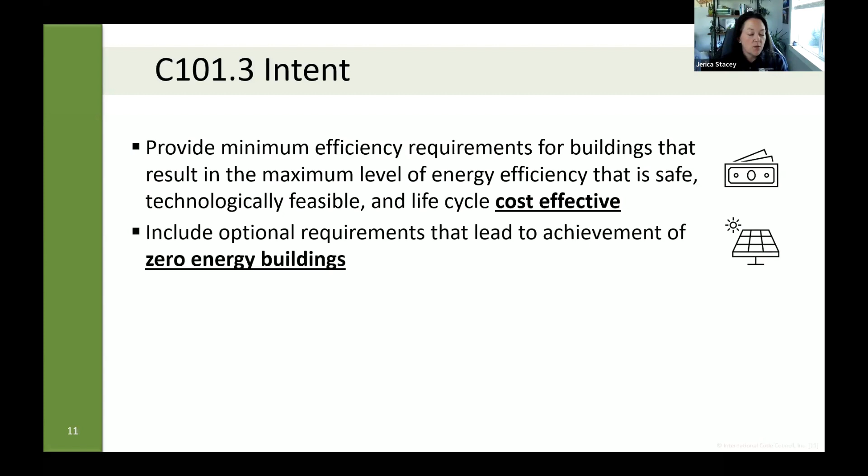We also need to make sure that there's a zero energy building compliance pathway. So for those jurisdictions that want to get to zero energy, we have to include within the energy code an option for them to get there. We do that through the zero energy appendix, and we had that in the 2021 as well. But we codified this language that says, yes, we have to have these options for jurisdictions that want to go above code minimum.

Along that same line, we can also include additional energy efficiency and greenhouse gas reduction resources within the code or within the appendix, depending on how you read the intent section. We wanted to make sure we were assisting jurisdictions in meeting all of their goals. This is the first time we actually see mention of greenhouse gas reduction resources in the energy code at all. We want to make sure those resources are available for jurisdictions.

And then finally, each subsequent edition has to provide increased energy savings over the prior edition. What that really means is that throughout the development process, we're constantly doing analysis. Pacific Northwest National Laboratory does the analysis to make sure that the changes occurring are going to result in an energy code that is more efficient than the previous version. We've actually been doing that with each code edition anyway.

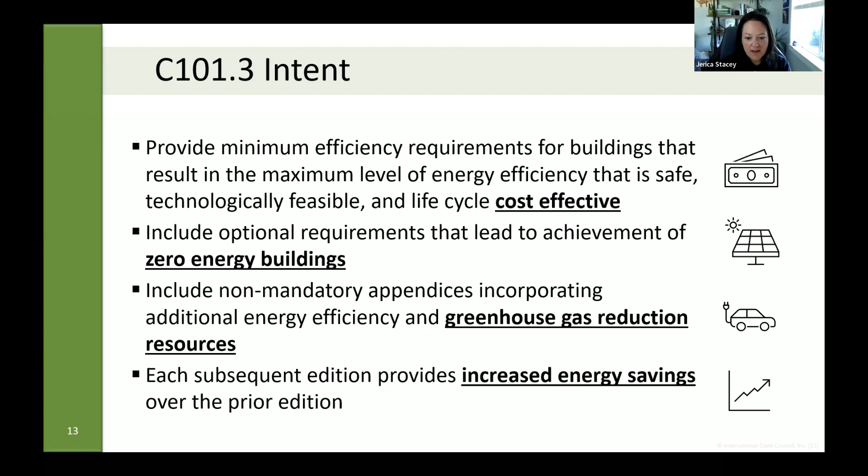I have a little bit of data here for you. Every time we have a new model energy code, the Department of Energy, through Pacific Northwest National Laboratory, issues a determination.

That determination is just whether the current version of the energy code is more efficient than the previous version. When we're talking about residential energy efficiency, DOE looks at the IECC and looks very closely at the residential provisions, comparing that to the previous code. On the commercial side, they typically look at ASHRAE Standard 90.1.

This data is still very important to us that are using the IECC because it is a compliance path, and we typically assume that our compliance paths are going to get you relatively to the same end point as far as energy efficiency goes.

So when DOE looked at ASHRAE Standard 90.1 2022, which is included in the 2024 IECC, they found about a 9 to 10% increase in site energy savings, increase in source energy savings, and then a reduction in carbon emissions by about 9%, and energy cost savings of about 9%, which those energy cost savings are really important to us in just affordability and that sort of thing.

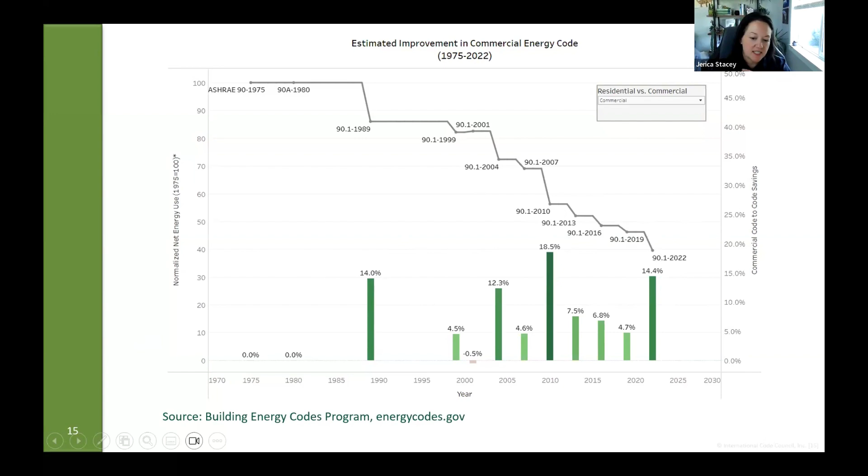We did get analysis on the 2021 IECC, but because that's not what the stretch code is based on, I'm not going to go into details on that. But I mentioned that we need to be doing analysis throughout the development process, so we do have some preliminary analysis on the commercial provisions of the IECC compared to the 2021 IECC. You can see here we're looking at about a 10% increase in savings, much like ASHRAE Standard 90.1, in site energy cost and emissions reductions. So very similar to what we see in 90.1.

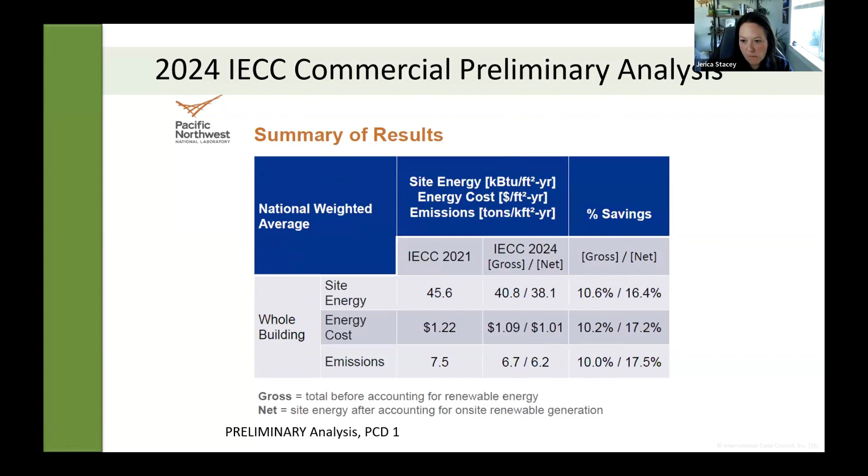A lot of the amendments that we find in the 2024 Illinois Stretch Code are going to support these main goals here. The ultimate goal as it relates to our energy code is to achieve a site energy index of 0.39 compared to the 2006 IECC, or less, by the end of 2031. This initial Illinois Stretch Code is going to help achieve this first goal of a 0.6 site energy index, and then each iteration after this will improve that site energy index to reach that final goal.

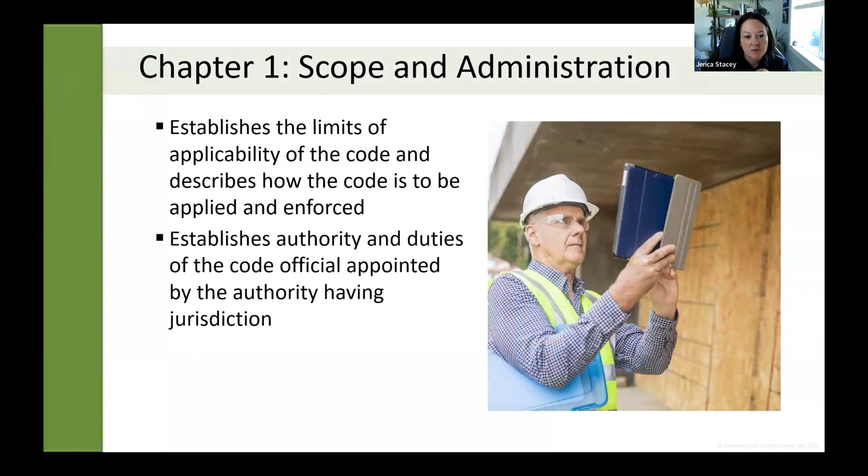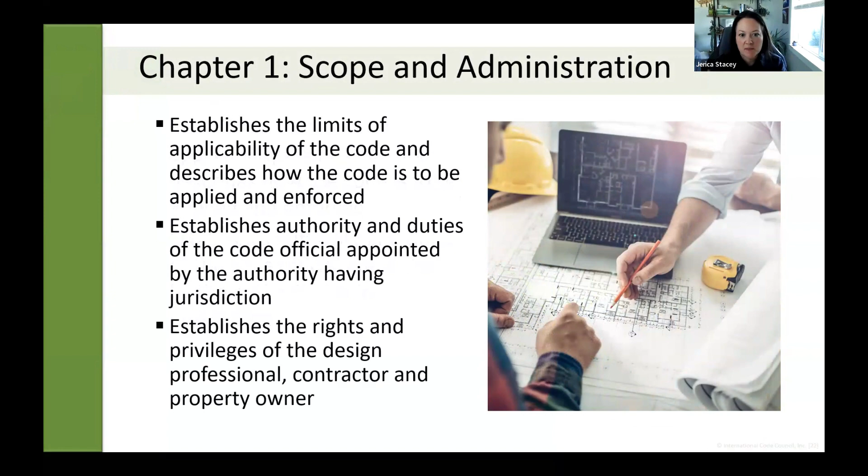We're going to talk first about some of the amendments in chapters 1 through 3, or what we typically call the administration chapters, that comprise the Illinois Stretch Code. These again are amendments to the 2024 IECC. Chapter 1 establishes the limits of applicability of the code and describes how the code is to be applied and enforced. This is the chapter where we find that brand new intent section. It also gives us the responsibilities of the code official and the rights and responsibilities of our design professionals, contractors, and property owners—essentially everybody's roles and responsibilities are outlined in chapter 1. There are a couple of amendments to make note of in the Illinois Stretch Code.

The first is that compliance enforcement procedures are going to be determined by the authority having jurisdiction. So that local jurisdiction is going to have the responsibility of establishing enforcement procedures. And then we also are going to see an expansion of the compliance options.

We can demonstrate compliance through materials like computer software, worksheets, manuals, those kinds of things, or we can have a professional architect or engineer seal on those construction documents, or we can also submit a ComCheck compliance report. So there are three options the code outlines that you can demonstrate compliance with. We would typically see a ComCheck report if you were going to use a component performance approach or total UA, that is within the prescriptive compliance path, for essentially calculating an allowance for your building thermal envelope. But this codifies that we can use ComCheck to demonstrate compliance.

We're also going to get an outline of the appropriate above code programs. We do know that typically in the base energy code, we allow the authority having jurisdiction to deem a program to be an above code program, and it would then comply with the energy code, as long as it also met some additional minimum standards. The Illinois Stretch Code says that for an above code program, we're either going to meet the program requirements of Passive House Institute US, or the requirements within Appendix CC. That is our zero energy commercial building provisions appendix, that is essentially going to have you comply with the 2024 IECC and then use enough on-site or off-site renewable energy to get to zero.

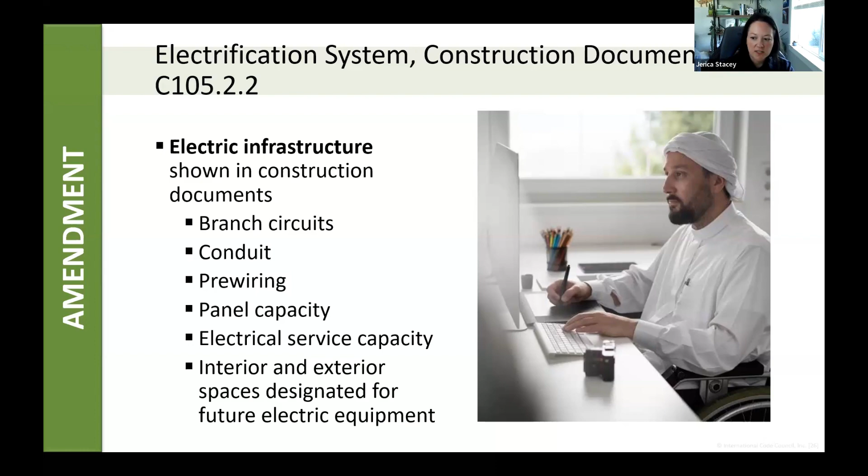We're also going to pick up verification of our electric infrastructure during the electrical system inspection. I didn't make a slide specific for that, but now that we have to show the electric infrastructure on our construction documents, we're also going to have to verify those in the field during that electrical system inspection.

Chapter 2 is our definition chapter. This is going to essentially include all of the specific definitions for the terms throughout the 2024 IECC. Most of our defined terms are going to be italicized, and where a term is not defined, we're going to rely on other I-code definitions. This is really important, especially with building mechanical systems, where we're relying on definitions that are in the International Mechanical Code, or we're going to use common use definitions.

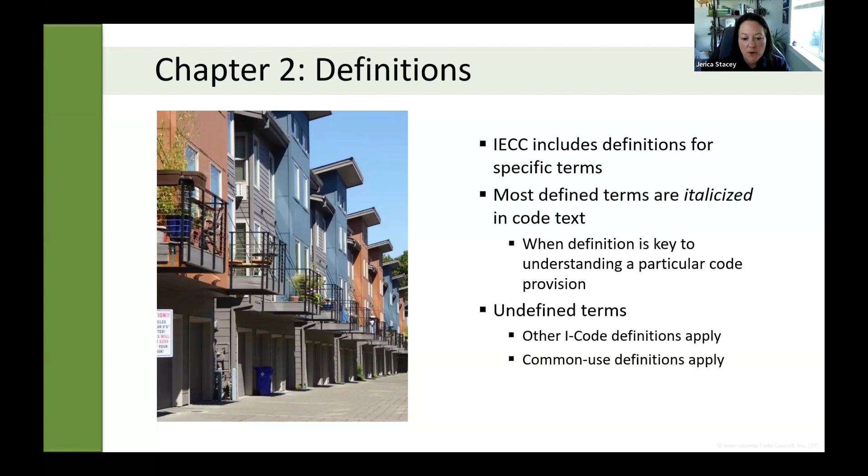I'm not going to go through all of the definitions that have been added to the 2024 or the stretch code, but I've categorized them here for you to be aware of. We're going to see new definitions in the 2024 for renewable energy procurement, thermal bridging, and mechanical equipment definitions.

There's a big effort on both the residential and commercial side to define almost every component of a mechanical system so we can effectively apply the code provisions to them. We'll find total system performance ratio related terms, fan system terms as we continue to look at the fan energy index as our metric for fan systems, and we'll continue to refine those definitions. Control systems for mechanical and lighting components will also get new definitions.

What's new to the stretch code that you won't find in the base energy code are our electric vehicle charging infrastructure terms. We'll talk about requirements for electric vehicle charging and see those terms, but I want to make sure you're aware that there are a lot of new definitions.

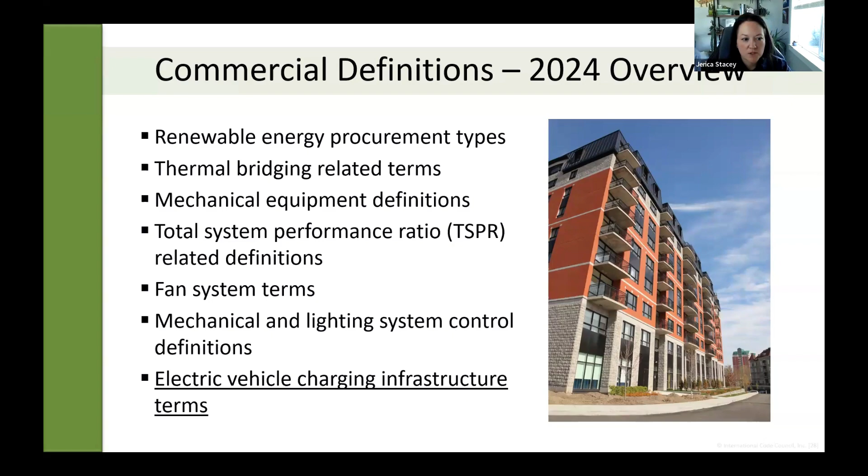When I teach a 2024 significant changes class specifically, I can go through three or four slides of just lists of terms that have changed. I always say, if you're brand new to a code or want to know exactly what's coming down the line, start in the definition section, because you'll pick up all these terms for new concepts. I also like to fine-tune my own knowledge on how the terms are defined. There are no changes to chapter 3.

Chapter 3 is our general requirements section. It's pretty much the catch-all for all of the provisions that don't necessarily fit somewhere else within the code. We did get that update to our climate zones in 2021.

We don't see any changes in 2024 or in the Illinois stretch code to any of those chapter 3 requirements. Our commercial energy efficiency requirements are in chapter 4. It applies to new construction, and wherever on the existing building side you trigger these requirements, it's going to send you back to chapter 4.

This is also where we find additional energy efficiency requirements, which have really been expanded in 2024. There are some changes or amendments that Illinois made to that section. I'm going to back up and talk about that section a bit more holistically, just to make sure we understand the concept behind it.

First, I'll let you know we do have our typical compliance options. These are really well defined in the 2021, and that carries over. But I love the usability of now saying you have two options for compliance with the commercial provisions: you can either use the IECC or ASHRAE Standard 90.1. If you use the IECC, you can choose between prescriptive compliance or simulated building performance compliance.

And if you use ASHRAE Standard 90.1, the stretch code includes some amendments to 90.1 as well, which isn't something we always see when states amend their energy code. So it's really cool that it's included in the base document. We'll start by talking about the changes that occur within the prescriptive compliance path, and then how those impact what we see in the other compliance paths as well.

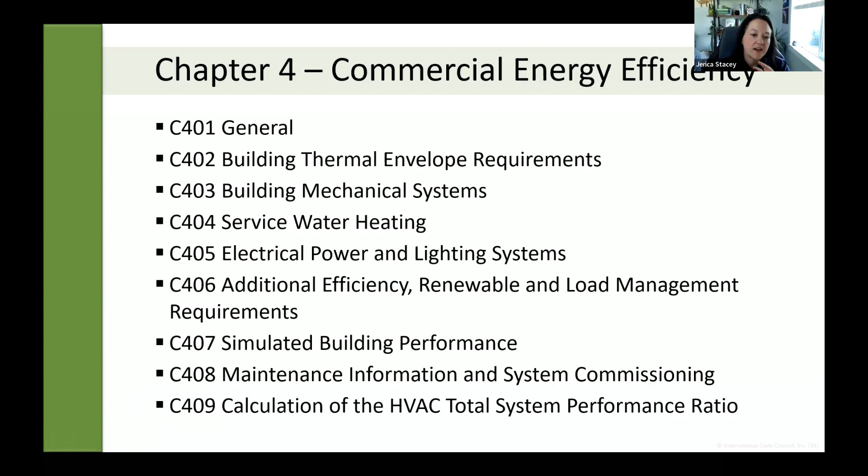It is a compliance option for prescriptive compliance for our building mechanical systems. So that's all I'll say on that, but just making sure that you folks are aware that this is a new requirement in 2024.

So thinking specifically about our Illinois amendments, the first we're going to find is our fenestration orientation section. Maybe not all of the items that we're talking about are amendments to the code. A lot of them are just new sections to the code, which again is Illinois amending the 2024, but not necessarily because there was already a section within the 2024 that we've just tweaked a little. This is new to the 2024 for Illinois as the stretch code.

So essentially, this section is going to limit our east and west facing fenestration. We know that east and west facing windows can contribute to significant heat gains, and most of the time that's going to increase our cooling costs as well. So this section is intended to put a limit on the area for our west oriented and east oriented fenestration. The code gives us 2 options.

The first option is looking at area only, and it limits both the west and east facing fenestration to 25% of the total area. So 25% for west oriented and 25% for east oriented. We've got that limit of about a quarter of our total fenestration area. The second option, it's also looking at area, but it brings in the solar heat gain coefficients as well as another element to figuring out your allowance for east and west facing fenestration.

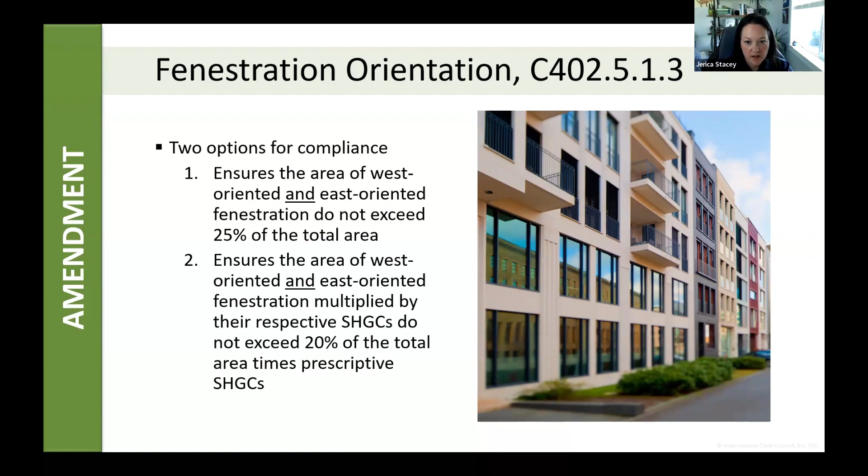We're also going to see a whole slew of requirements related to demand response. Demand response is a concept. I like this little image here. It's kind of geared towards homeowners, but we're going to use our imagination and expand that to our commercial buildings as well. But the main concept is that a building owner or a homeowner, or perhaps it's a tenant in one of our multifamily buildings, they're going to participate in a demand response program.

The utility company or whoever might be issuing a demand response signal is going to send out a signal when we actually need to decrease the energy use. And we're going to require for different building systems for our energy use to be decreased, either by lowering our set points or reducing our output, that sort of thing, for a period of time. Once that signal is ended, then we go back to our normal energy use.

So we see this in our building mechanical sections, where we essentially are going to require that all electric heating and cooling systems have a control that allows for you to participate in the demand response program. There's no requirement to actually participate. This is just allowing you to if you choose to. And typically, you're going to be financially awarded if you do so.

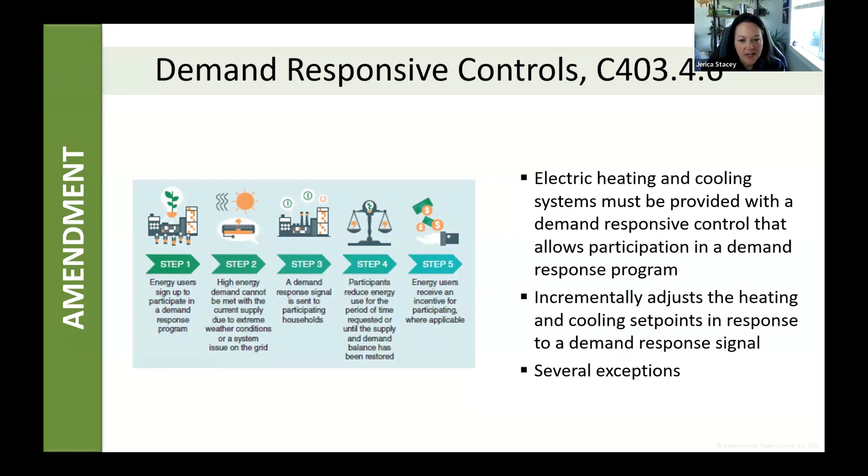On the mechanical side, we're going to adjust the heating and cooling set points by 1 degree, 2 degrees, 3 degrees, 4 degrees over the period of that demand response signal. And again, once it ends, we go back to our normal use. There are some exceptions. Those are going to include things like group H and I occupancies, but throughout this webinar, we're not going to discuss all of the very specific exceptions. So if you're thinking, I don't work on projects that this seems like it would apply to, make sure you check out those exceptions. And that goes for all of our provisions.

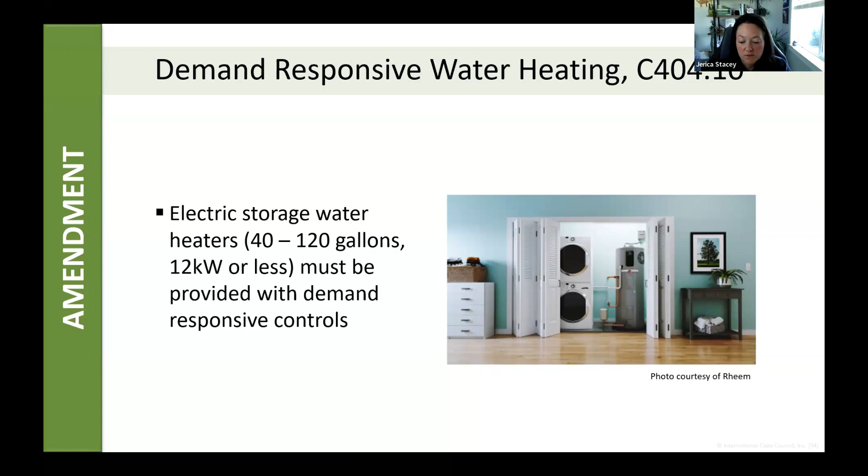Now, water heaters are going to play an important role in demand flexibility because they inherently provide thermal storage. So if we can shift that energy use over a period of time, we're going to be able to meet those goals of our demand signal, and typically with no impact to the user either.

But we also see our demand responsive lighting controls. So this is going to apply to group B, E, M, and S occupancies. And the requirement is that the interior general lighting in at least 75% of the interior floor area has demand response controls. This is another little graphic that kind of looks specifically at how we want the lighting to react when it receives this demand responsive control.

Essentially, what we want to have happen is that we're going to control the output of that lighting to 80% over the period of that demand response signal, but no more than 15 minutes. And we're doing that through continuous dimming. So as soon as we receive that signal, we're continuously dimming for no more than 15 minutes until we get to 80% of the output. And then we can just kind of hold it there. Once that demand response signal is lifted, we're going to go back to our normal lighting settings.

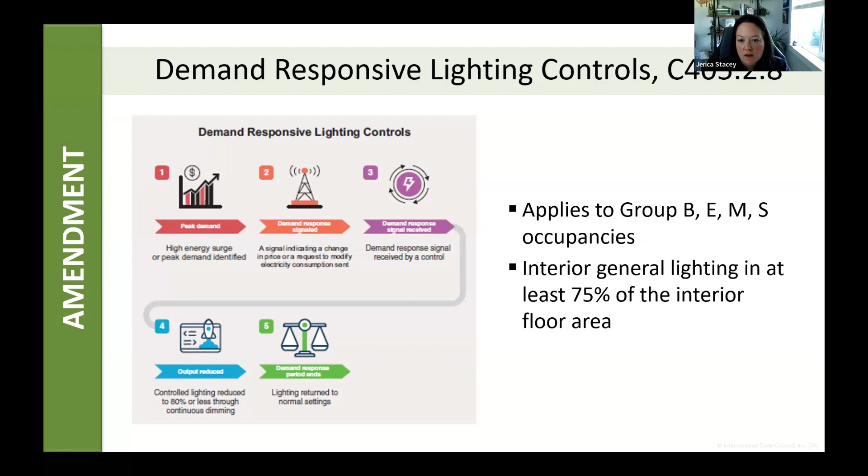We also are going to see some amendments to our horticultural lighting section. So this is a section that is in the 2024 IECC, whereas most of the previous ones are not in the 2024 IECC. They're available as appendices. But this requirement is actually in the 2024 IECC. It's an improvement to the requirement in the 2021, which is where we first saw our plant growth lighting requirements come into play in the model energy codes.

So in grow lighting, we're looking at micromoles per joule, which is this kind of funky looking metric here. That's a measurement of lighting efficiency. It effectively shows us how effectively a grow light converts electrical energy into usable light for our plants. The 2024 is going to give us two different thresholds depending on what our growth facility looks like. If it's a greenhouse, and these have to be permanent greenhouses, so those that are constructed for more than 180 days, our threshold is going to be 1.7 micromoles per joule or better.

For all other horticultural lighting, so this is going to be like our vertical farms and that sort of thing, we are going to have a threshold of 2.2 micromoles per joule. The higher micromole per joule indicates a more efficient light source. So we do have this amendment in the Illinois stretch code that improves the 2024 requirement of 1.9 to 2.2. So we are requiring some more efficient lighting in the 2024. The other amendment that we see in the Illinois stretch code is the exception for cannabis facilities that are subject to the Cannabis Regulation and Tax Act.

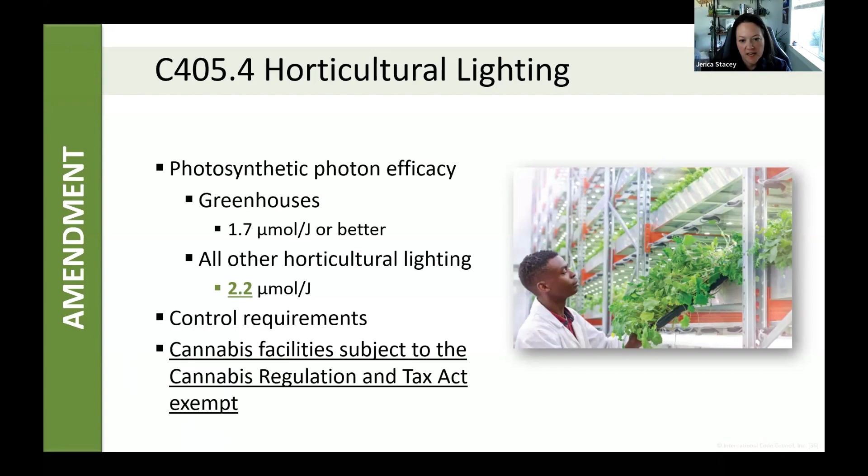We're also going to get requirements for EV infrastructure. So the Illinois stretch code is going to require that our parking facilities have some amount of electric vehicle power infrastructure. And that's going to be determined by table C405-14-1, which I'll show you in a couple slides here. That's going to detail our space types, so whether that's EV capable, EV ready, or EV installed based on our occupancy type. It's also going to be based on the number of automobile parking spaces for that building. And specifically, when we're talking about group R2 buildings, that's going to be based on the number of dwelling units or parking spaces, whichever is less.

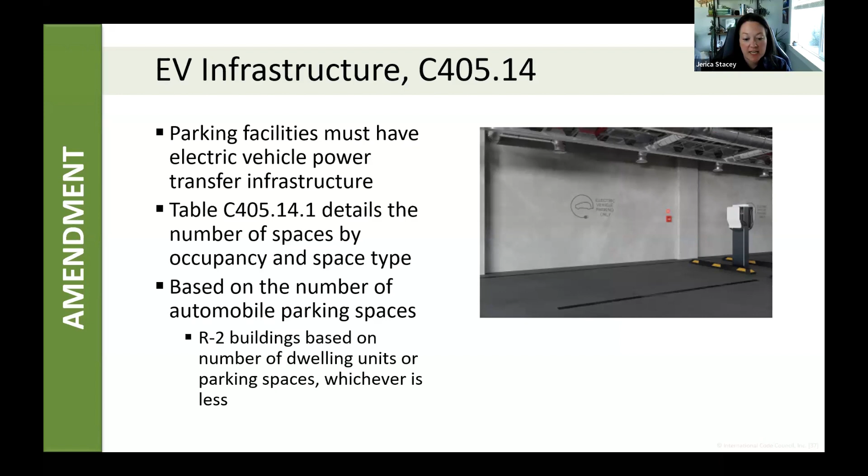So this is one of those provisions that really supports some of CEJA's goals, specifically that goal that is to accelerate electric vehicle adoption and expand the charging station infrastructure. So this code provision is where we're going to pick up those new definitions that are related to electric vehicles, and these also are going to support those requirements for the different space types. It's going to be dependent on what our occupancy type is, but there are different space types.

EV capable, which is a parking spot that has the electrical infrastructure installed. EV ready, which is basically an add-on to that capable. It's got all the electrical infrastructure and it has an outlet or enclosure to connect to that electric vehicle supply equipment. And then an EVSE space is going to be everything fully installed there, ready to plug into your electric vehicle.

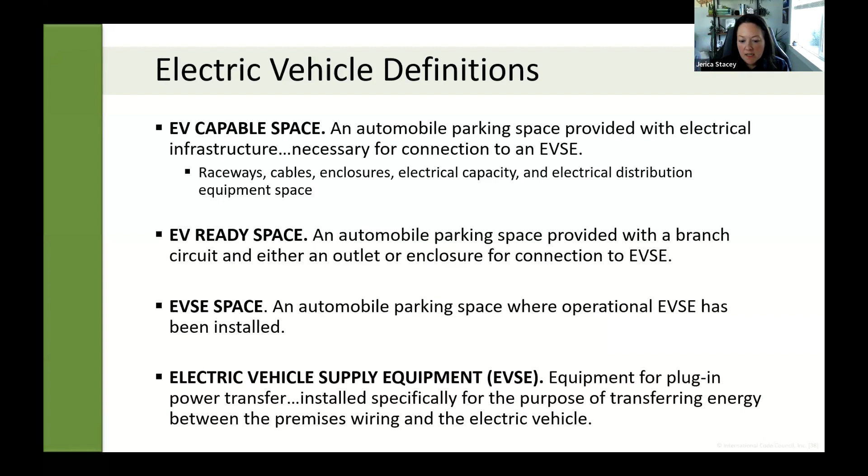So table C405.14.1 is going to tell us how many of these space types, whether that's EV installed, EV ready, or EV capable, are required based on our occupancy type. The code is also going to allow us, if we install more EVSE spaces than is required, to count those towards those ready and capable spaces. And if we install more EV ready spaces, we can count that towards our percentage of EV capable spaces. So essentially, this gives us a tiered approach to our electric vehicle charging infrastructure.

Now, you will notice that for some of these occupancy types, 100% of their parking spaces are going to have to be one of these three. Group R-2 is what I'm thinking of specifically, where 75% are capable, so they have the electric infrastructure, 5% are ready, and then 20% are going to be fully installed.

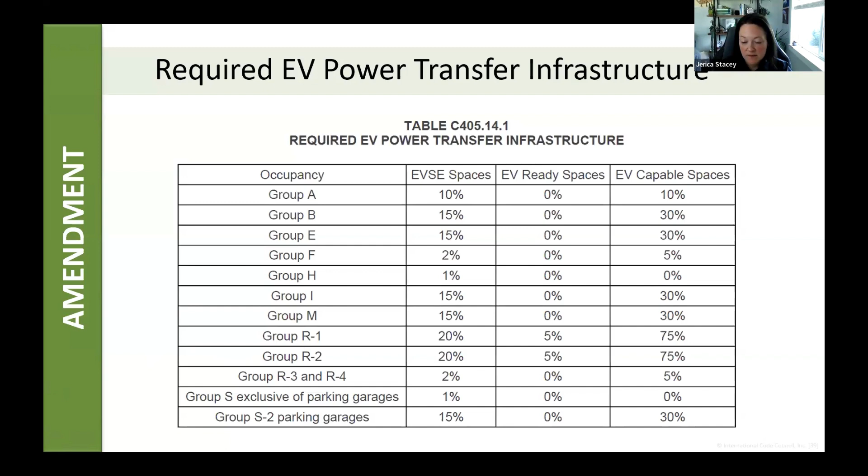We also have a requirement for electrical energy storage systems. This is one of the requirements that really allows the designer and the building owner to decide how to best meet this requirement by giving us two options. The ultimate goal is that all of our commercial projects will have electric energy storage systems in the future. However, this requirement allows us to either be ESS ready, which means that we have an area that's reserved for energy storage systems, essentially ready to install ESS somewhere down the line, or we can just go ahead and meet the requirement by having an installed energy storage system.

The code is going to outline what that actually looks like, but this is one of those requirements that's also going to support the CEJA goals of that energy transition for our communities. This is going to help us, especially as in the 2024, we are going to require some amount of renewable energy for all buildings in climate zones 0 through 7. So this is in support of that same concept.

The other part of this requirement is really going to point us to the International Fire Code and NFPA 855 for those very specific location and minimum area requirements. So you'll want to pay very close attention to those referenced codes and standards as well.

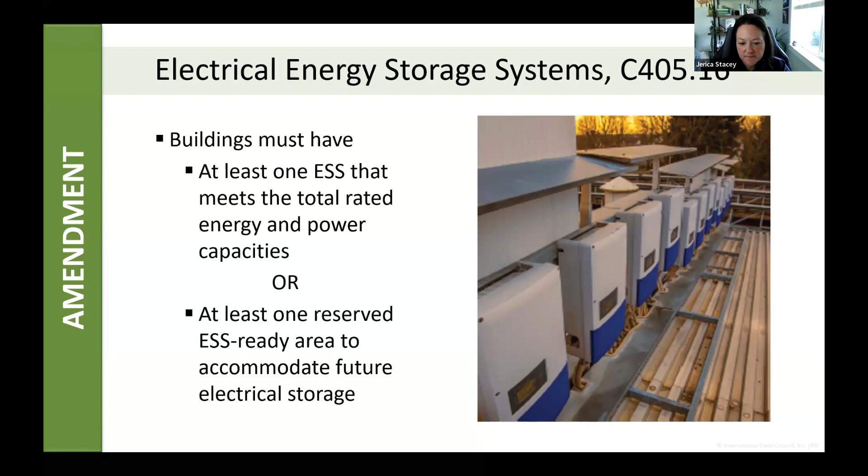And the final one before we talk about additional energy efficiency credits is electric infrastructure. This requirement is going to apply to our Group R-2 occupancies, so those occupancies that have dwelling units, and it's going to require electric infrastructure anywhere that you have fossil fuel equipment installed. So this is going to apply to our space heating equipment, service water heating equipment, our cooking equipment, so ranges and ovens, and then our clothes drying equipment as well.

Anytime we have combustion equipment for one of these 4 equipment types, we also have to have enough corresponding electric infrastructure so that these equipment types can be swapped out for electric in the future without the cost of retrofit. So that's really the important concept behind this, that the next building owner, or, because we're talking about Group R-2 occupancies, the next occupants of that dwelling unit are able to swap out their equipment without the cost of retrofits. And this is also going to support CEJA's goal of supporting communities that are facing that energy transition.

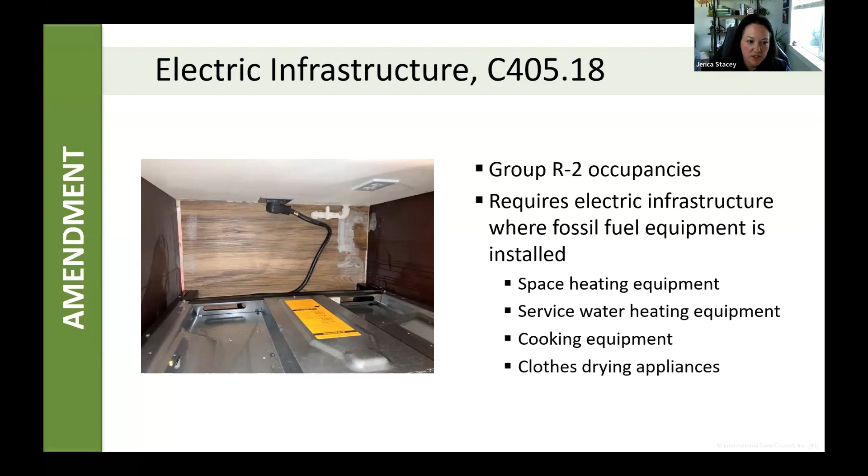All right. We're going to talk now about additional energy efficiency credits. It's not minor, but there's really only one amendment within this section, but I want to talk through the section so that we can see how that amendment actually impacts us. This is a requirement for projects that are complying prescriptively with the code. This section has a complete overhaul compared to 2021. If you're used to the 18 code, the 21 is going to look different, and this is going to look very different. So in 21, we moved towards this credit-based system where we have to earn a certain number of credits based on our occupancy type.

And that same concept applies in 2024, but we really have expanded the number of credits that you have to achieve, as well as requiring renewable and load management credits. The stretch code amendment is going to be an adjustment factor for buildings without heat pumps. So that's the real difference between the 2024 and the Illinois stretch code: this multiplier of the number of credits we have to achieve for buildings that do not have heat pumps.

A reminder that our energy credits have to be over and above what you are already doing in your project to comply with the base requirements of the 2024 IECC, or what the Illinois Stretch Code requires here. There is no double dipping. So if you've already improved your fenestration using some kind of total UA trade-off, you can't then get more credit for that improved fenestration, for example.

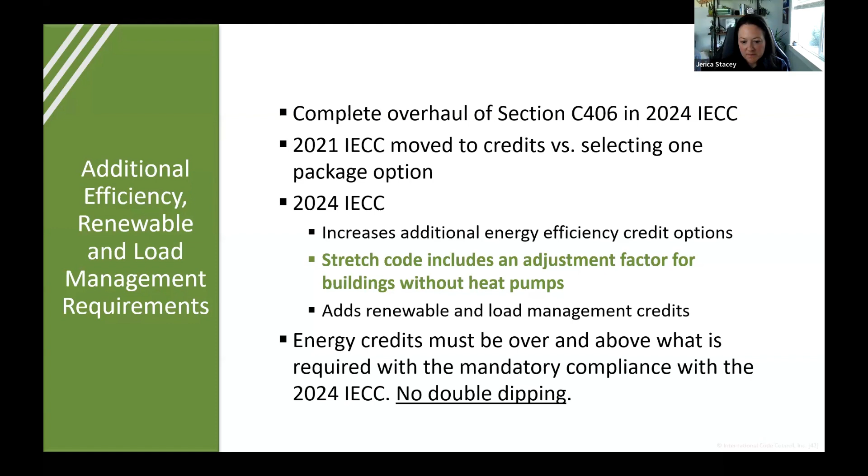The 2024 Illinois Stretch Code includes 32 energy credit measures that we can choose from to achieve those additional efficiency requirements for our building.

The number of credits you need is based on your occupancy type and climate zone, and every measure is worth a different amount of credits depending on those factors. Each credit represents 0.1% of whole building site energy, and the goal is that each project improves their energy cost savings by about 7%. That's why we see differences in the number of credits required, because we're ultimately trying to hit that 7% goal.

In 2024, we also have load management and renewable energy credits introduced. There is some carryover allowed between energy efficiency or base energy credits and those renewable and load management credits. It can be a complicated concept we won't cover today, but just know that if you exceed your credits, you can use them to help reduce the number of credits you might need elsewhere.

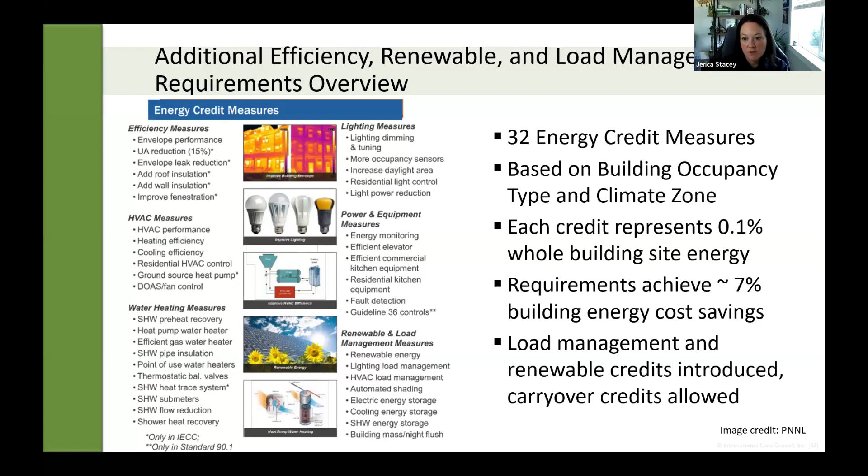So what does this really look like? If we have a building over 2,000 square feet, our additional energy efficiency credits apply. We have two different sets of credits now: additional energy efficiency credits, which I basically just call base energy credits, and these impact the building system—improving the building thermal envelope or the efficiency of our mechanical system. These are elements within the building that are more permanent in nature.

Then for projects over 5,000 square feet, we're going to have a certain amount of additional energy efficiency credits and renewable and load management credits. This is a new set of credits we have to achieve, and those are going to be less permanent in nature—more like adding additional renewable energy or managing loads and that sort of thing.

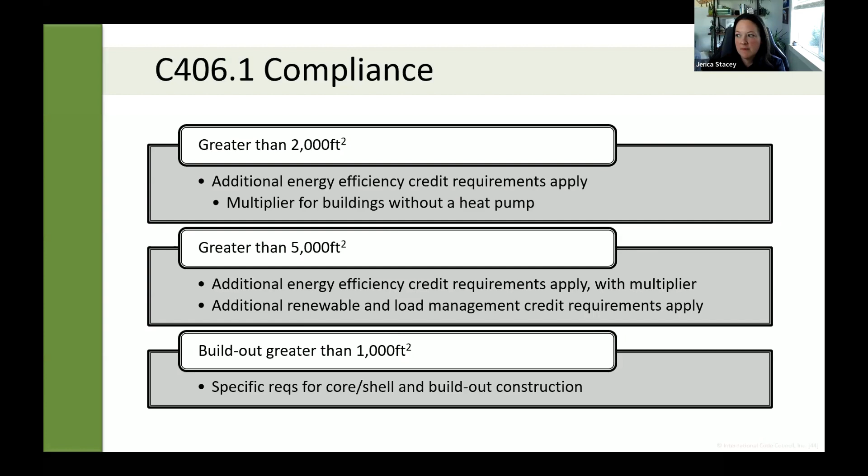This is an example of what our energy credit table looks like. It's based on your occupancy type and also your climate zone. For example, if we had an office building in climate zone 5A, we'd have to achieve 71 additional efficiency credits. The amendment to the stretch code tells us that if our project does not have a heat pump, we have to multiply this number by 1.25. So for the same office building, climate zone 5A, occupancy type B, we would typically need 71 credits, but now multiplying by 1.25, we know we need 89 credits instead. That's the amendment within this section for the Illinois Stretch Code—that multiplier.

Now, to finish this discussion, the measure tables you're seeing now are based on occupancy type B. We talked about having a group B in climate zone 5A—now we can see how those energy measure credits apply to our climate zone. So if we improve our total UA by 15%, we get 21 points, and you mix and match until you hit that required number, in our case 89 points. This is obviously a partial table, but it gives you a good idea of the number of credits based on climate zone and what you're actually doing to that building.

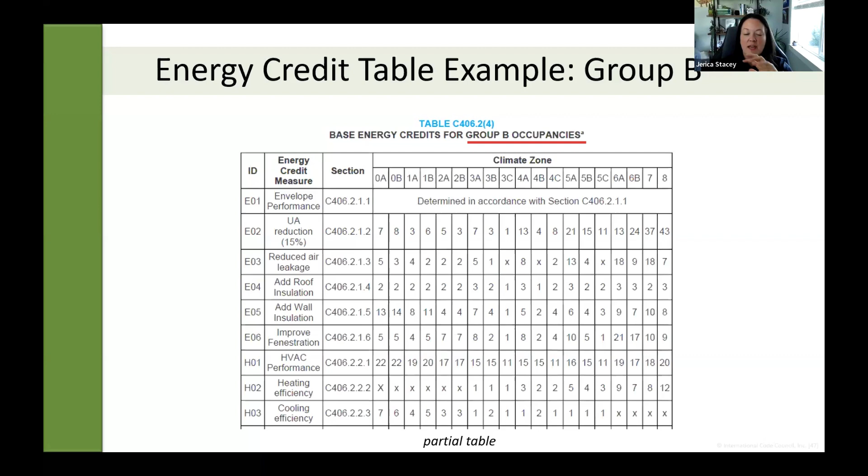Now, the other side of this: let's say we have a project over 5,000 square feet. We're also going to need renewable and load management credits, in addition to the base energy credits we just discussed.

Now we need renewable and load management credits. If we're in climate zone 5A, we have occupancy type B, we're going to need 38 credits.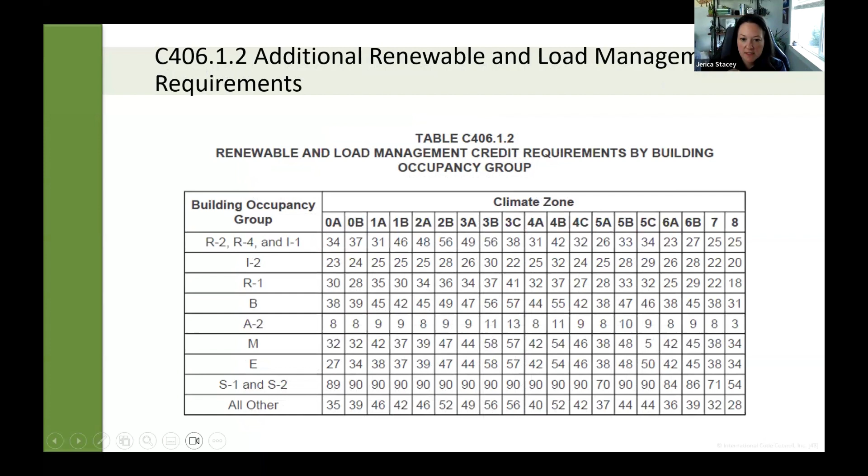There is no multiplier to our renewable and load management credits. That is important to note. We do have the multiplier for our base energy credits, but not here for renewable and load management. We're also going to see measure tables like this based on our occupancy type, so to achieve the required number of credits, we're going to mix and match from a variety of renewable and load management strategies.

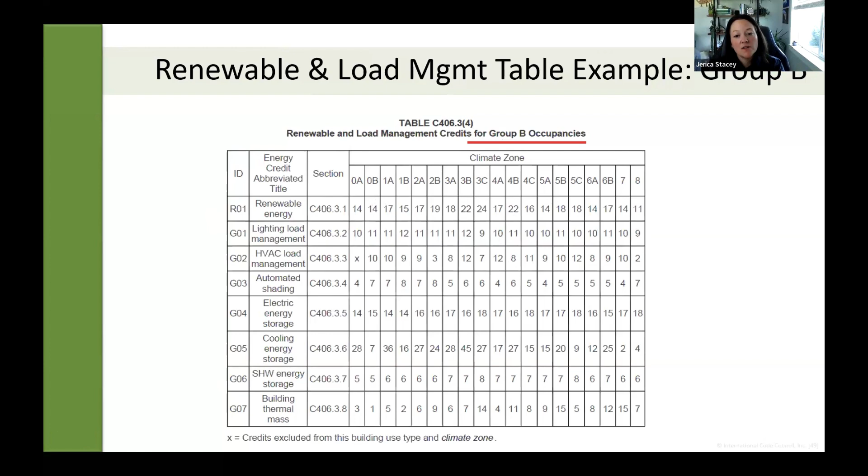I wanted to go a little more in depth than I typically would, because we're also going to see these energy credits show up in our other compliance paths as well.

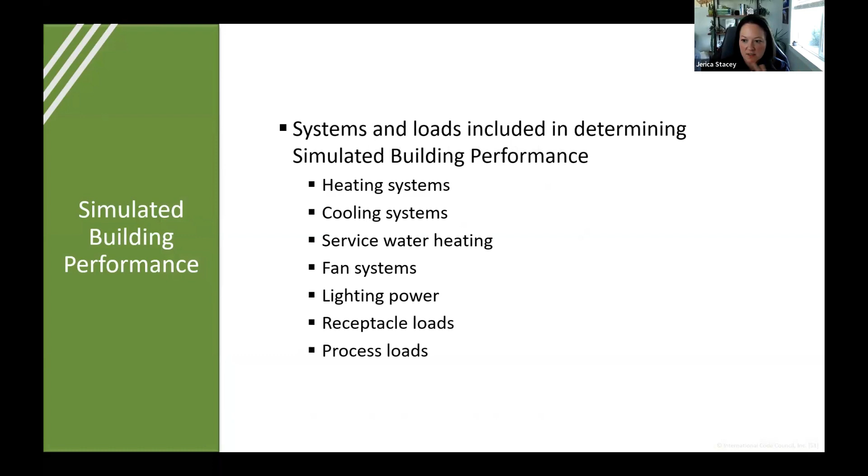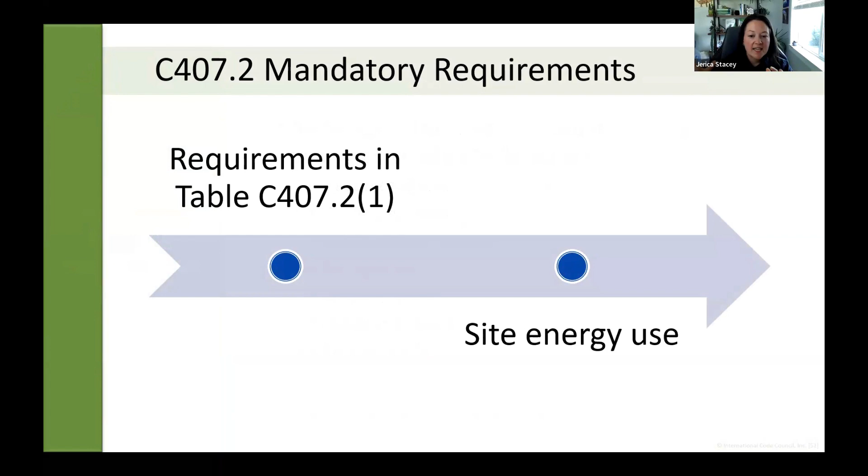When we're talking about complying with the code using section C407, this is our simulated building performance compliance option. This considers almost all of the systems within our building: heating, cooling, service water heating, receptacle loads, process loads, that sort of thing. To comply with this path, you have to meet the requirements in table C407.2(1), our mandatory requirement table, and meet a site energy use goal.

Looking just at that mandatory table, anything that was added to the Illinois stretch code is also going to be added here if it makes sense. Not everything, but if it's deemed a mandatory requirement and applies to all projects regardless of compliance path, you'll find it in this table. So you see that fenestration orientation provision we talked about.

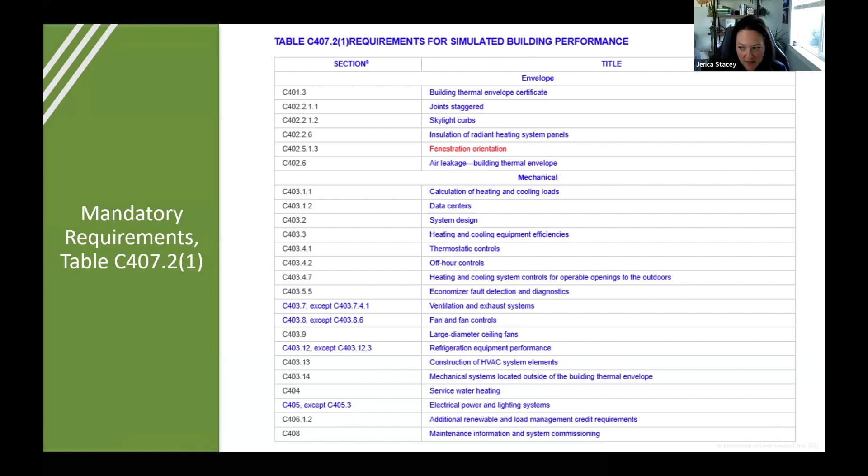If you drill down into here, we talked about demand response in our service water heating and in our lighting systems. You're also going to have those same requirements if you're using simulated building performance, because they are tucked up into these sections. I also want to make sure you see that our additional renewable and load management credit requirements are going to apply if we're using C407 as well, so those credits are going to be in this list of mandatory requirements.

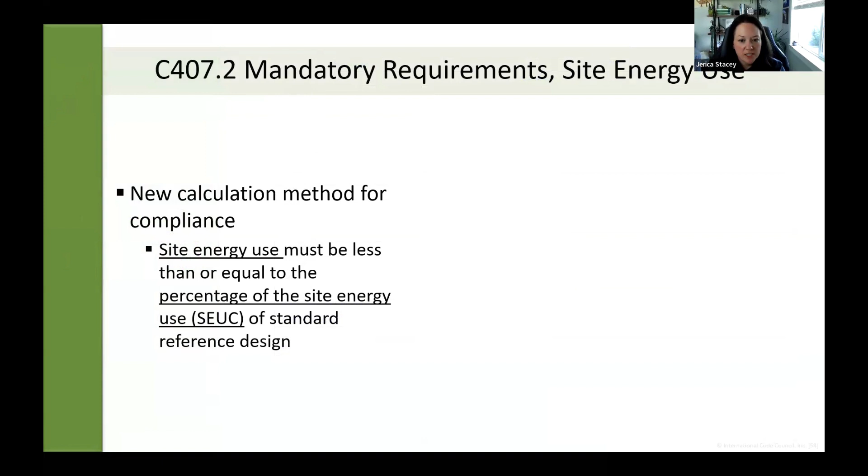Now we are going to get a new calculation method for compliance using site energy use. Typically the IECC uses energy cost, but because we are trying to achieve those CEJA goals, we use site energy use in the Illinois stretch code. There's a new way to determine what your site energy use has to be in relation to your standard reference design, so we get this new calculation method.

This is our percentage of site energy use of our proposed design has to be less than or equal to the percent of site energy use of our standard reference design. We're going to use this equation here. A couple things to know: this 0.8 is essentially what was required in the 2021 code. Previously your energy cost had to be 80% of your standard reference design, so that's where we get that 0.8.

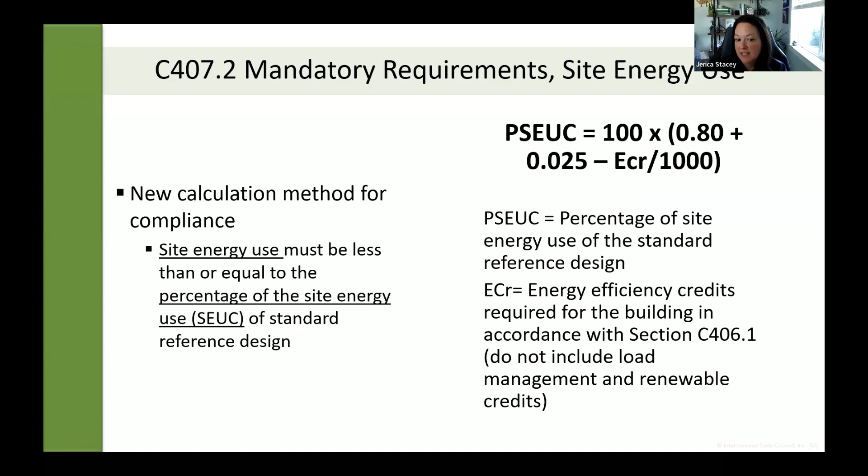Our energy credits are going to show up in this calculation as well, so we're going to go back to those energy credit tables and plug it in. I have a quick example, and I know we're getting close on time, but I want to make sure we see how this works. To rewind and bullet point this: we get a new calculation method, using site energy use in place of energy cost, and that site energy use has to be less than or equal to the PSEUC, which we calculate now.

So if we go back to our office building example, we're in climate zone 5A. The building does not have a heat pump, and that's going to be important because remember, we have that multiplier if we don't have a heat pump.

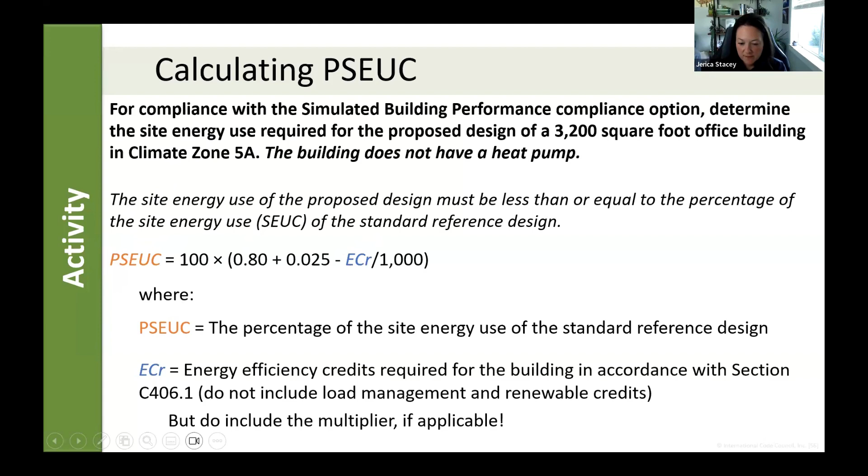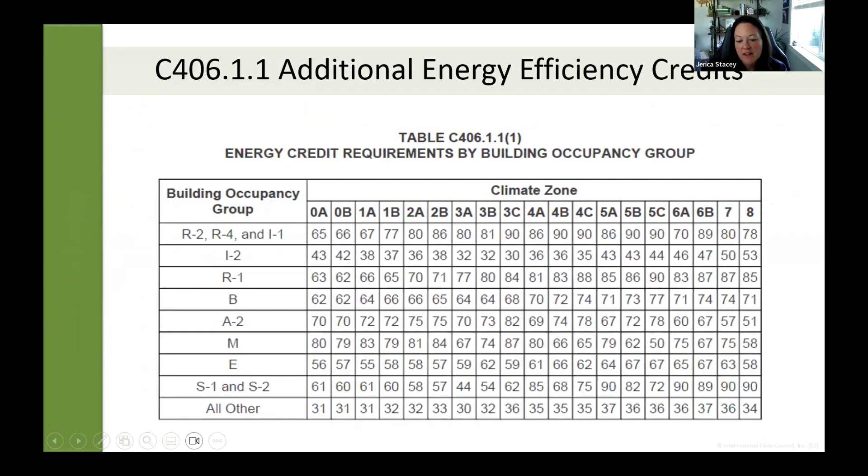Looking just at our equation here, what we're calculating is the number of energy credits that we need to achieve. So if we go back to our energy credit table, we know we're in climate zone 5A, occupancy type B, we need 71 credits, but we have that multiplier because we don't have a heat pump in our building, so we really need 89 energy credits.

So we're going to plug in 89 into our equation here, do all the math to figure out that our percentage of site energy use has to be 73.6% or less of our standard reference design. So you really are using those energy credits to calculate what our site energy use has to be for our projects if we're using simulated building performance.

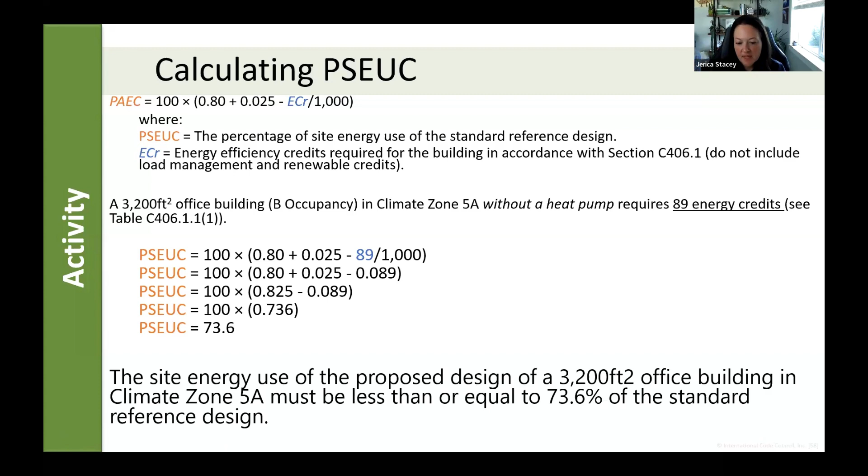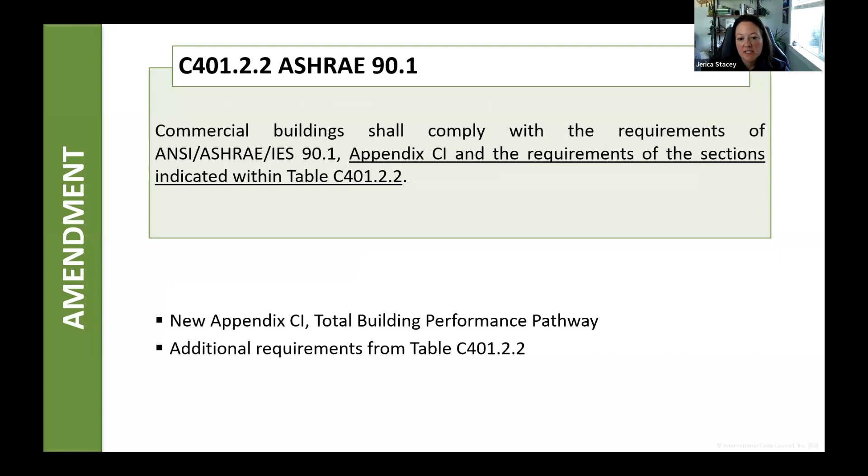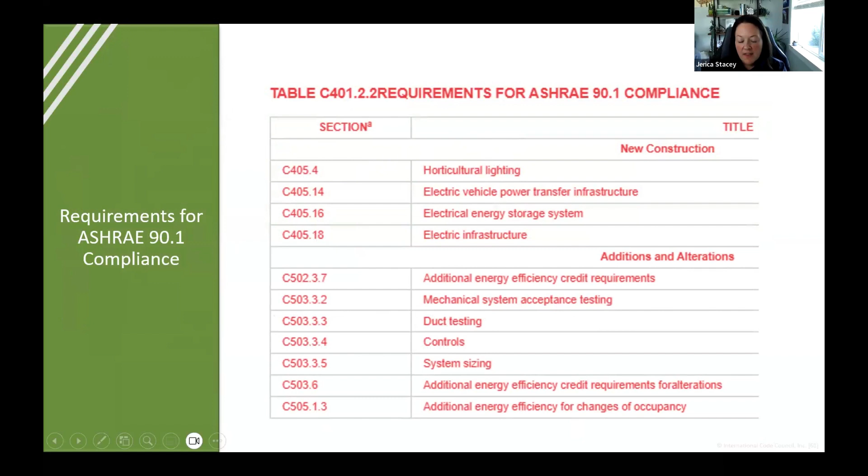And then the last couple slides I have here are if you're using ASHRAE standard 90.1, the Illinois stretch code also provides you with some amendments to standard 90.1. First, you are going to have to meet the requirements of Appendix CI, or Total Building Performance Pathway, and you're going to have to meet the additional requirements in table C401.2.2. This table I pulled straight out of the online version. It's going to pretty much hit all of the items we've talked about today. So if you're complying with 90.1, you also have the horticultural lighting, electric vehicle infrastructure, and so on, and you have to comply with Appendix CI. Appendix CI really just replaces energy cost with site energy throughout 90.1. So it details those sections where you're going to have to replace the concept of energy cost with site energy instead, which we already see in the simulated building performance compliance pathway as well for the IECC.

I'm going to turn it back over to Kindy. When you get this handout, you'll have all of the resources available to you that I've thrown in the chat and mentioned as we've moved through this, as well as some other resources, like significant changes to 90.1. There's a really cool quick sheet, and links to our 2024 IECC significant changes if you want to see how the base energy code has changed.

And it's great for our future listeners who might have to check back in as their needs arise. So we just wanted to share a couple more resources from the hub. This recording will be available on our education page along with Jerica's slide deck, and all the links will be hyperlinked within that slide deck. I just wanted to point out some of the resources, and Jerica already pointed to this on our website at buildinghub.energy. We have our stretch code guides for both commercial and residential, the Illinois stretch code compliance checklist, and we can't forget our great friends at SEDAC, the Smart Energy Design Assistance Center based out of University of Illinois, Urbana-Champaign. They have a lot of wonderful resources as well.